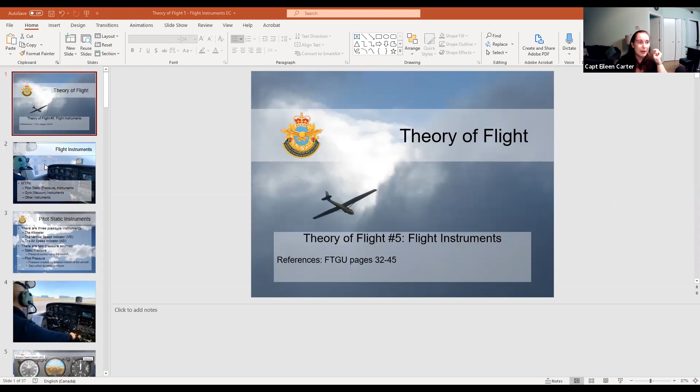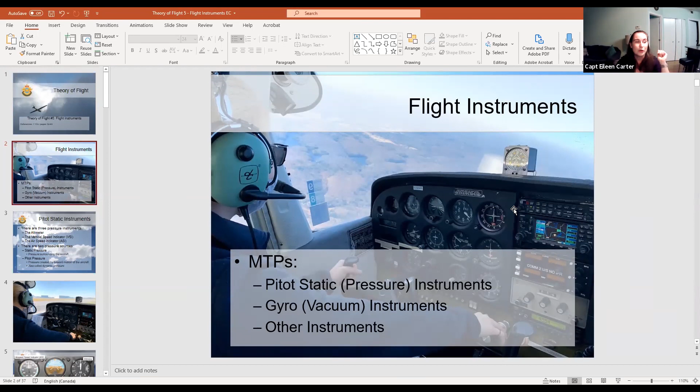All right, so flight instruments, what are those all about? Well, we've got a couple of main teaching points for you guys tonight. Let me see if I can make that a bit bigger. Can you guys all see the screen really well? Let me know if there's any problems. So our main teaching points tonight, we're going to talk about 2 main categories of instruments, plus the others. We'll talk about pitot-static or pressure instruments. We'll talk about gyroscopic, which are vacuum powered instruments. They could be electrical, but either way. And other instruments. So that's the goal for tonight and our 3 main categories.

So I think that the warrant officers are going to talk to you first a little bit about the 3 main types of pressure instruments that we deal with. We see these both in powered aircraft, like the one you see in this slide here, and in gliders, which some of you guys will hopefully learn how to fly next summer. Go ahead, you guys. Awesome. Thank you for the introduction, ma'am. So I myself am a glider pilot from 2 summers ago, also from 706 in the Ottawa region. So great to see so many of you here taking this ground school.

Just to start off now with the pitot-static instruments, as Captain Carter mentioned, there are 3 pressure instruments, and they are the altimeter, the vertical speed indicator, and the airspeed indicator.

Together, they use the pressure system that is comprised of two pressure sources: the static pressure source, which is the pressure surrounding an aircraft. So right now, say you're in a room, the ambient pressure around you could be similar to what you would see as static pressure.

And then we have the pitot pressure, which is created by the forward motion of the aircraft. So it's like if you put your hand out of the window of a moving car, you know that the air is hitting it at a higher rate, and there's more air against your hand, so that'll kind of push it back or push it up. So those are the two main pressure sources, and they pretty much comprise how the other three instruments above work.

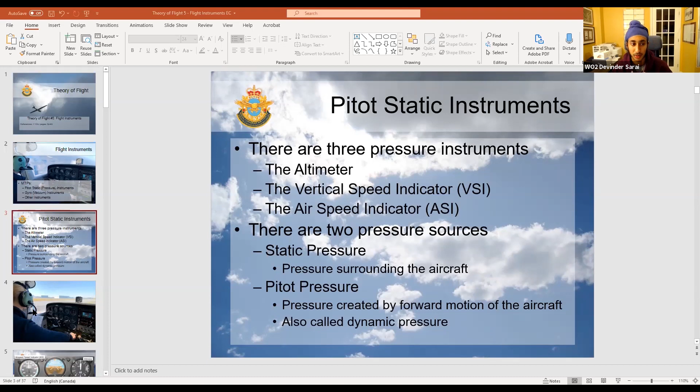All right. And so here is a look at an instrument panel in a Cessna 172. So you can probably make out there's an instrument. Can you see my mouse on the screen? Are you guys able to see that as it moves? Yeah, Sergeant Sutton's nodding.

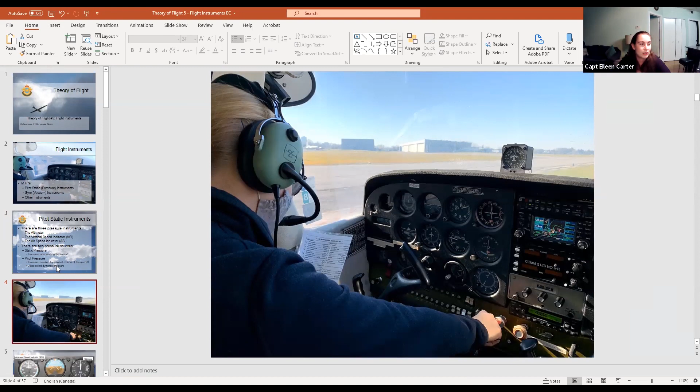Got an altimeter here, a vertical speed indicator here, and the airspeed indicator. It's a bit hard to see over here, but don't worry, we have some more pictures for you. There you go.

So we've labeled them here for you, and we are going to talk about the other three that are currently unlabeled. We've got an airspeed indicator at the top left, altimeter at the top right, and a vertical speed indicator, VSI, at the bottom right. Pilots traditionally refer to this as a six-pack. These are the important instruments to be referring to throughout your flight.

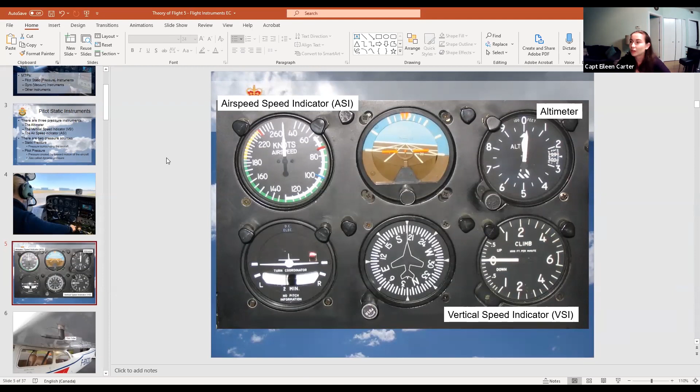So do you guys want to give a little bit of an explanation about the pitot and static ports? For sure. So the pitot tube is what collects the pitot pressure that we discussed earlier, pressure created by the forward movement of the aircraft. So it's going to be facing directly into the direction of the aircraft. But does anyone know, you can type it in the chat, why it's on the wing? Why isn't it right beside the fuselage, or right behind the propeller?

Because that's right where the wing is before it gets interrupted. Because in the back, the air that's coming would have already been hit by the wings or the body of the aircraft. Okay, really close. Yes, from 742, it would get a false reading from the propeller, right? Because the propeller is shooting all this air back. So you're going to be thinking that you're at a different speed than you actually are. So that's pretty much the pitot tube.

Did I miss anything, Gimenakis, on that? I don't think so. You pretty much covered the main points. If there's one takeaway, it would be that the pitot tube gets the air pressure as a result of motion. So depending on the different speeds or motions the aircraft is going through, that pressure will change.

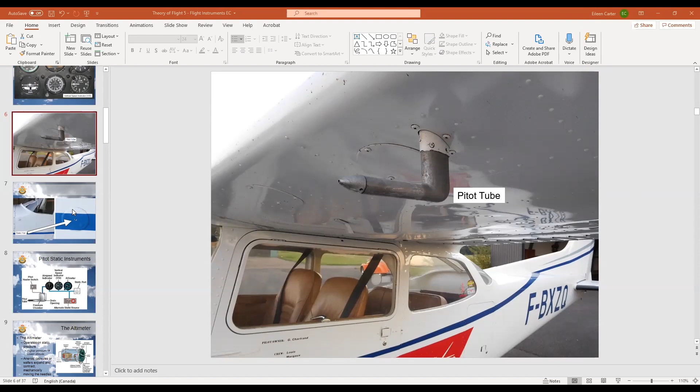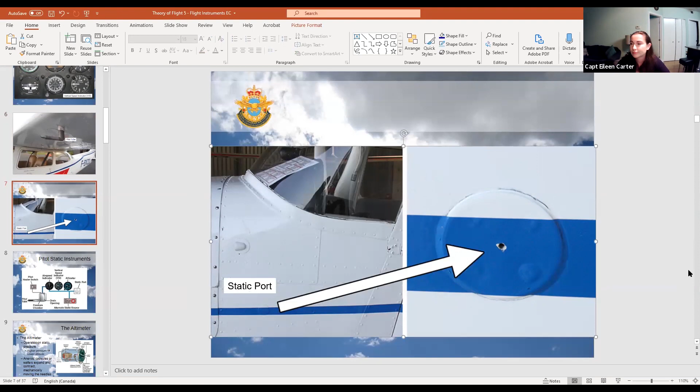Great. And so here's a look. There's two pictures here. This is the nose of the aircraft. You can see there's the dash, the instrument panel, and then the static port. Oh, I think it's behind this label, actually. There it is. The static port is that little circle right there. And then here's a close-up of that. Yeah, so most times it's perpendicular, so 90 degrees to the relative airflow. So that's only capturing the ambient pressure and not the pressure created by the forward movement of the aircraft.

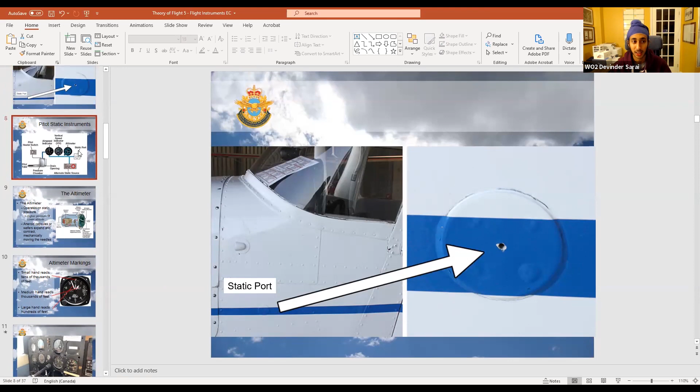Great, and then together, both of these, the pitot tube and the static port, combine to create the pitot-static system, which is in this diagram right here. So the pitot tube takes pitot pressure, and the static port takes the static pressure. With these two together, they provide the basis of the functionality for the three instruments that we discussed.

It's important also to note that the only one that's using both the static and pitot pressure is the airspeed indicator. So that's definitely really key, especially for studying. Airspeed indicator is the only one that uses both of these sources. And just to give a brief explanation of why, it's because when you're calculating speed, you need to know your movement going forward, because that's what speed is, right? Whereas the other ones, the vertical speed indicator and the altimeter, only use the static port.

There's also two other things here that I haven't touched on yet. The pitot heater switch, so that can prevent ice buildup in the pitot tube, which we'll probably discuss later in errors, but that'll just keep your air consistent and prevent any blockages, which could lead to other problems.

And the second one in the bottom right is the alternate static source. So that's in case your static port is blocked, you can use another source that will serve in the same vein. And fun fact, in most airplanes, you can actually break the glass with the VSI to act as an alternate static source, just for those of you who are curious.

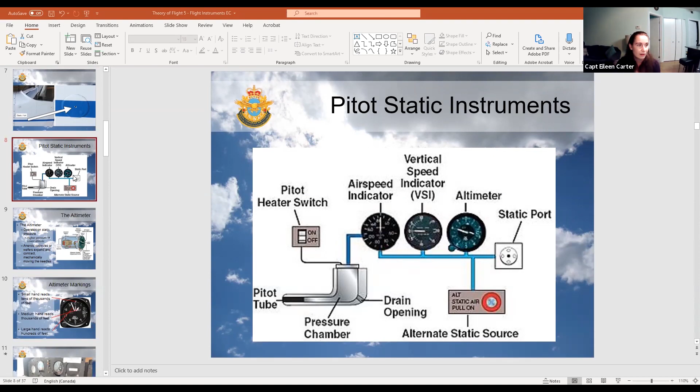So let's talk a little bit more specifically about the altimeter then. Oh, and Sergeant Louise put their rank on there too. Thank you so much. So like Warrant Officer Sarai was saying, this operates on static pressure. And so it doesn't need the dynamic pressure of what we had earlier. And inside are something called aneroid capsules or wafers. I, as a cadet, always found this really hard to understand.

But what I do understand is if I have a bottle of water and I go on a commercial flight, Air Canada, WestJet, and I sip from that water, and then at some point I put the cap on and the aircraft goes to land, what does that bottle of water look like by the time we land? Has this ever happened to anybody? The bottle of water that I've half drunk, or maybe it's empty, what does that look like by the time we get down on the ground?

Sergeant Sutton says it's squished. A couple of you guys have your hands up. You can go ahead, say it out loud. You can unmute yourself and participate. Sergeant Defer thinks that after landing the water bottle has expanded. That's the opposite of what Sergeant Sutton thinks. What about the rest of you guys? Sergeant Billet or Cadet Abu Hamad, what do you guys think?

So the air in the half of the bottle that has air left in it gets expanded at high altitudes. It's true. And then once you go to lower altitude when you're landing, it'll compress the air that's in it. Exactly. So it'll kind of get smushed a little bit.

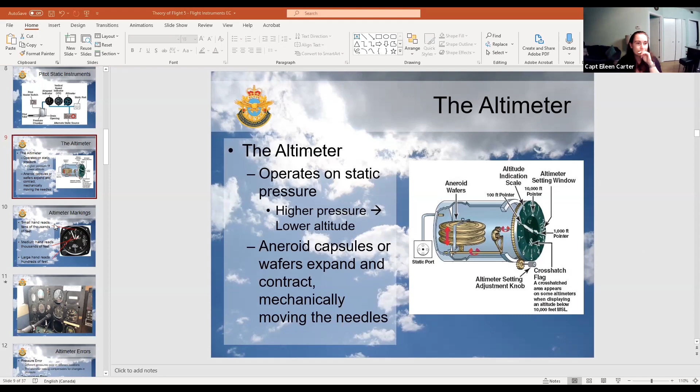And so these are examples of how air pressure is changing things inside your ears. So we all do actually understand how altimeters work. Do you guys want to add some more to that there, Warrants? I think you covered everything. Okay. I agree. Well, why don't you guys follow on then with our markings of an altimeter? For sure. Gymnakis, you want to take this one? Yeah, let's go for it.

So as we can see, the chart is pretty self-explanatory. It works in the same manner as a clock. Your shorthand, your super shorthand actually, is... Mind if I interrupt you? Oh, go for it. Because a lot of the people in this virtual room might not have ever read an analog clock.

So give me a yes. There's a little thing you can select that says yes, near where you raise your hand. Give me a yes if you read a clock with hands and a no if you don't. I want to know if you guys know how to read a clock with hands or not. You can put it in the chat. As a matter of fact, in the chat, can you guys put up what altitude this is indicating?

Ooh, there you go. That's even better. So I'm getting yeses from some of you guys anyways. All right. Well, I have more faith. I was thinking that you guys might only know how to read an Apple Watch or something like that. Okay. Sorry for interrupting.

Oh, some good, interesting guesses in the chat for the altitudes too. All right, so I'm seeing it's pretty much varied between 1,950 and 950 feet. So there's a bit of confirmation bias as well in the chat. I think so as well. So far, I don't think anyone has the correct answer. I'll give you a hint. Pay close attention to the increase between hundreds of feet, like how many tick marks there are between each.

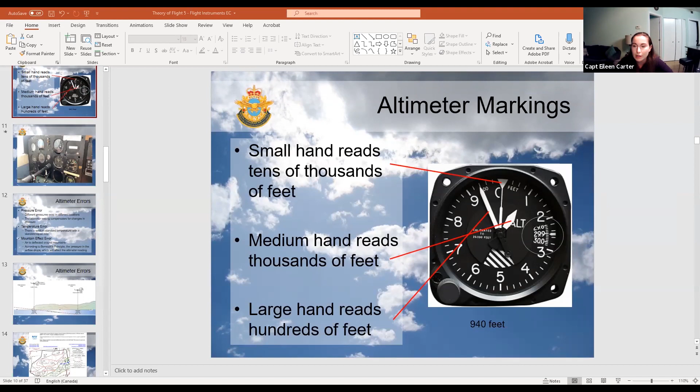I actually have a short video clip a couple of slides up to show you about that. I have a video right now for you. It's an aircraft in flight that's just below 3,000 feet and it's climbing. So let me share that with you. It may play a little bit choppy, in which case we'll replay it. It's also a little bit loud, so be prepared if you have a headset on. I'll turn down the volume a bit too. It is this loud in an airplane, but you're wearing a headset, so that makes it easier. All right, here you go.

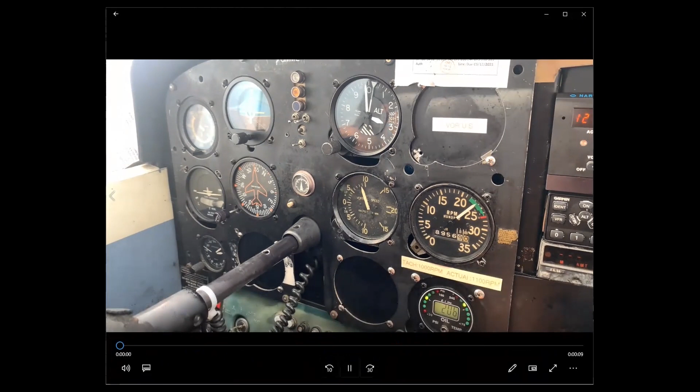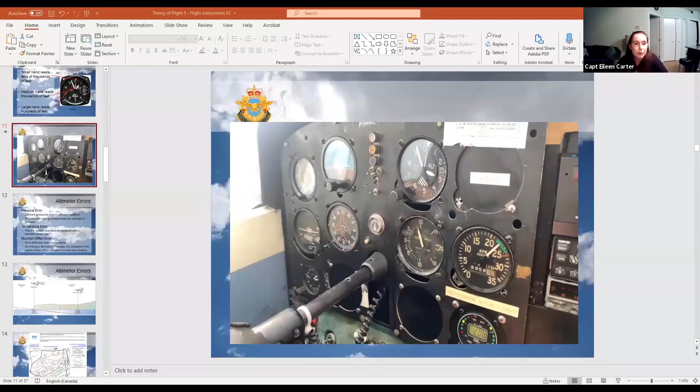Oh, it's really choppy, isn't it? Did it play for you guys? It did not. All right, let's try it again. Yeah, it might be asking too much to have 51 people and a video. I'm going to try and play it out of the PowerPoint instead, because it's also in there. And if not, I will post this video for you to watch on your own. Does that sound fair? We won't hold up everything.

Oh yeah, here you go. Can you see the needle moving now? It's gotten a bit choppy, but you can get a couple of frames out of it. Anyways, that's the altimeter climbing up. I will repost that on the website a little later so that you can see it for yourself. It's just a short little clip to see that altimeter in action.

So the altimeter is subject to, oh, my PowerPoint is now frozen too. That's what I get for playing videos for you, hey?

There we go. So the altimeter is subject to actually a number of different errors. We're talking to you about 3 specific ones because they're more important or more noteworthy. But you can imagine it has mechanical problems and things like that too. So the three we're going to talk to you about are pressure error, temperature error, and mountain effect error.

And Warrant Officer Chamanakis already spoke a little bit about how pressure is different in different locations, and that's why we have to move that window. And I'm going to show you a little bit about what that looks like, what that means. And we're able then to change the setting to match the pressure in the place that we're going.

A good analogy that helped me to understand this was, we know that right now here in Ottawa, it's just coming up on 7 o'clock, but in Manitoba, it's coming up on 6 o'clock. So we know if we fly to Manitoba, we have to reset our clocks, and we've got a dial or a setting that will allow us to reset our clocks to adjust for that. And the altimeter is the same.

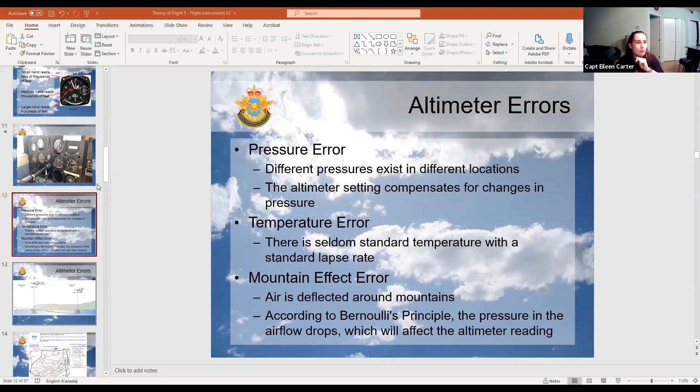So if you're worried about it going a bit fast, we are going to come back with diagrams to each of these, assuming that the PowerPoint will cooperate. We might need to restart that.

So how can this possibly work? Let me turn away my messages.

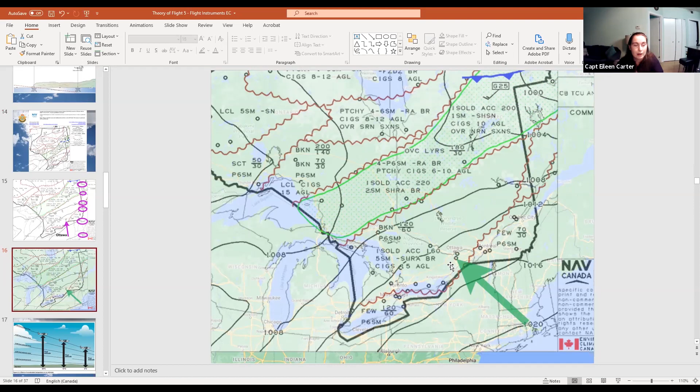These are lines that join areas of equal pressure. Do you remember what those are called from your meteorology class? Lines that join areas of equal pressure? Isobars. Flight Sergeant Falsetto did raise their hand, and then everybody typed it in, but yes, isobars. So this image is showing isobars.

So I'm going to go back to the original one. You can make them out now where I had them circled, and you can see that pressure is decreasing as we move north from Ottawa. And so if we were to get in an airplane and fly a couple hours north, our pressure would have really changed. And so if we don't reset our altimeter, we'll have an error.

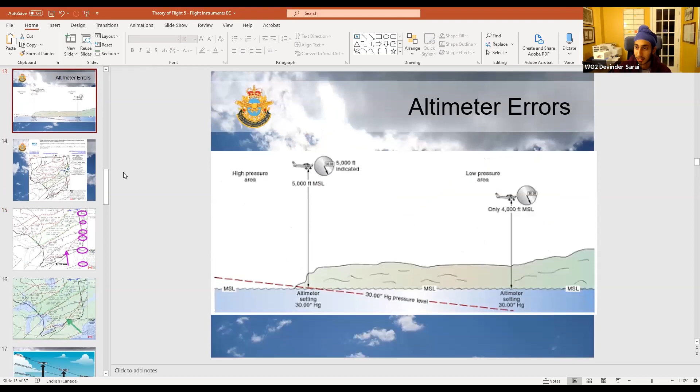Do you want to add to that, Warnester Sarai or Warrant Officer Chamanakis? I think you have a really good example a few slides up as well to show that pressure can change overnight, right? So when you come to your aircraft in the morning, or if you are planning to go on glider, when you get to the gliders in the morning, sometimes it can be reading even below ground. So that's something to watch for too.

I do. Shall we try playing this video and see how choppy it is?

So I'm a flight instructor at the local flying club, and I was the first person to fly this airplane one morning. And when I got to that airplane, this is what the altimeter said. Now, we're not at sea level here in Ottawa. If the ocean was here, it would in fact be about 200 feet below us. Because of the way that the ground rises coming away from the ocean, our ground level is 200 feet above the ocean. So according to this altimeter, I'm almost 300 feet underground, which is truly false.

What's actually happened is an area of high pressure has moved over Ottawa overnight and has told this altimeter that the pressure is higher. And therefore the altimeter says, well, I have to go lower then. I must be underground. So it's a really great example of an altimeter error. And then I'm going to use the knob on this left-hand side here to change this window to the correct altimeter setting. And I know at Rockcliffe Airport that the ground level is 188 feet. So that's what I'm going to do here.

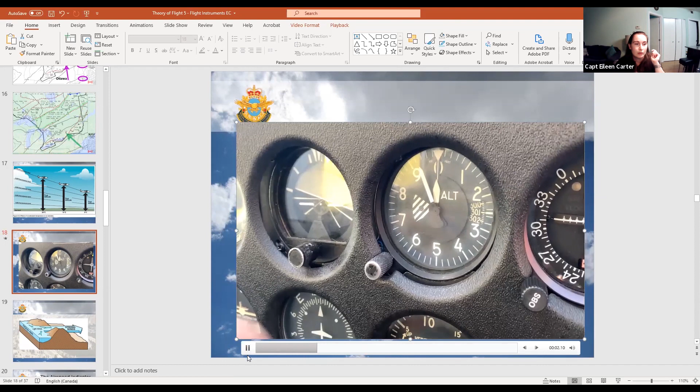Let's see if the video will play. Cross your fingers. Well, that was a bit choppy. We'll do it one more time. That was much better. I will repost it for you as well. Did you get a chance to see that?

Did that make sense? I adjusted the subscale so that the altimeter error was removed. The pressure error was removed. Anything to add to that one, Mr. Chemanakis? Nope, I think we're good. Cool. I'm going to back up one slide here.

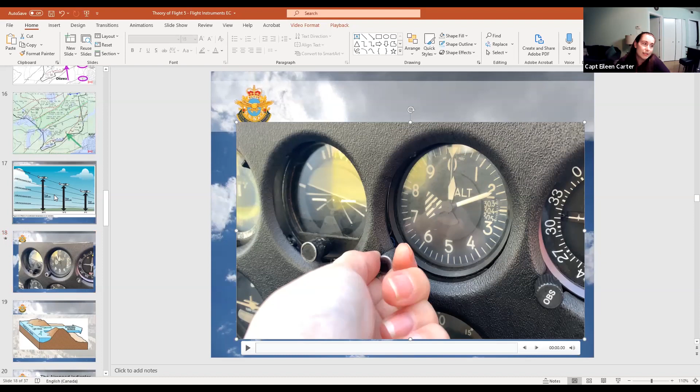So in a similar way to how pressure can change over distance, and you can then get an altimeter error, temperature can change over distance. And when temperature gets colder, it also makes the air more dense. And as a result, you're lower than you think. So if you were to fly as this aircraft did, when their altimeter was reading 5,000 feet in 30 degrees Celsius, if it flew into a colder area, the same way it can be a different temperature in Montreal than it is in Ottawa, maybe not 15 degrees different, but a couple degrees different.

And obviously some aircraft fly a lot farther. They might end up in Vancouver a few hours later, might have a very different temperature. Flying into 15 degrees or 0 degrees will create a big altitude difference, a big altimeter error if it's not corrected for. And typically we correct for this just by changing the subscale on the altimeter, but there are additionally calculations that we can do.

It's not required in this class, just interesting for you to know that we can calculate the true altitude using information about the temperature and the pressure. So that's something you will do in a couple of years when you're on your course to get your private pilot's license. You guys want to add to that? Sure. I'm just wondering, who knows what the standard ICAO temperature is at sea level? Way to drag meteorology into the conversation some more. That's good. Yes, exactly. 15 degrees Celsius.

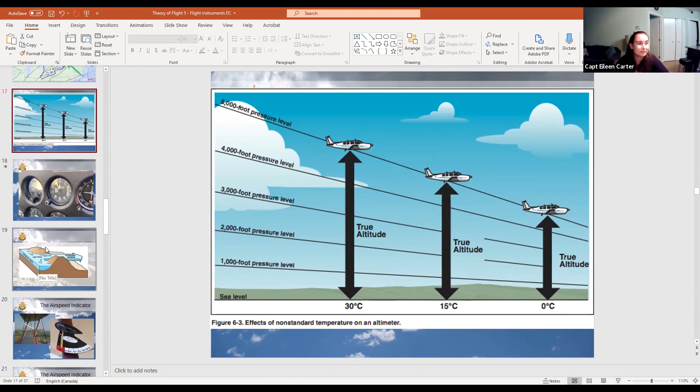So the last of the 3 errors that we said we wanted to talk to you guys about is a mountain effect or a mountain error. Earlier in Theory of Flight, you learned about Bernoulli, right? Which said that if something in a system changes, something else has to change to correspond. And I think many of you guys on a hot summer's day have had a hose in your hand and put your thumb over the end of the water hose. What happens when you do that? When you're holding a hose of water with a big open end, and you put your thumb over the end of it and block part of the opening, what happens to the water?

A couple of you guys raising your hand, go ahead and tell me. We get a spray, it shoots out, the stream gets stronger. Yeah, so you guys have all personally experimented with Bernoulli. You guys all know what I'm talking about, right? So it gets stronger, and it gets stronger because the opening is smaller, so the water has to go through there faster. What's interesting that you probably don't realize is that at the same time, pressure also decreases.

So the image you're looking at on your screen, my audio is bugging out. Is that happening for everybody or just for Corporal Weiss? It's fine for me, so. Okay, sorry about that, Corporal Weiss. It might be your internet. Yeah, I'm aware. We're gonna go over time. It's fine.

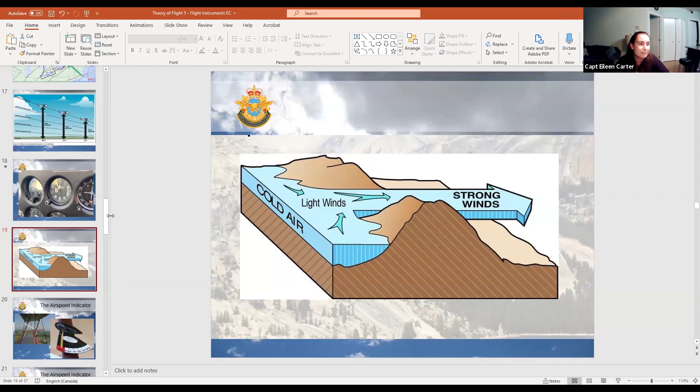It is the equivalent, like what Warrant Officer Sarai was saying at the beginning of the class, of sticking your hand out the window of your car. And I think if you did that, and somebody said, oh, we're going 50 or we're going 100, and then later they asked you how fast are we going now, you could probably say, just based on your experience, you've calibrated your hand out the window of your car, you'd be able to say you're going 50 or 100, maybe even 30, whatever the speed was. So this is the original airspeed indicator. It's not more complicated than that.

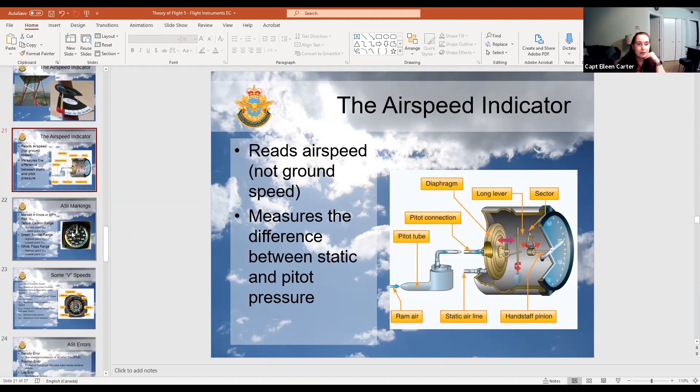This is the fastest speed that the airplane should go. Can it go faster? But it shouldn't, is the point. It's the velocity you shouldn't exceed. We may talk more about why that is in a different class. And the other end of the scale, all the way back over here, is VSO, which I'll give you some definitions of on the next slide.

LAC Zaidan, why don't you unmute yourself and tell us what your question is, because I'm not quite following you. Do you have a microphone? Can you tell us? Can you hear me? Yep. Okay, when I mean that indicator, I just want to ask, isn't there the same instrument, but that indicates the speed, but inside the cockpit, inside the airplane?

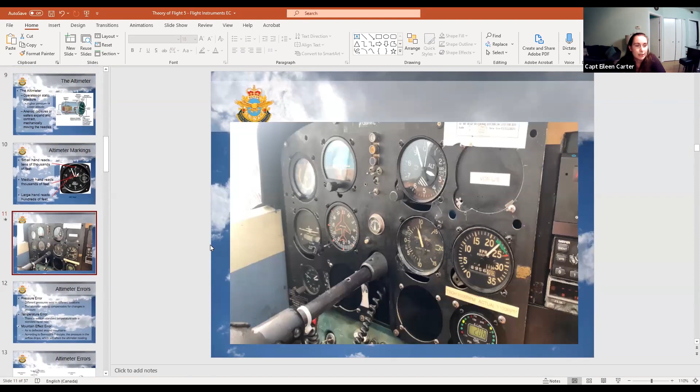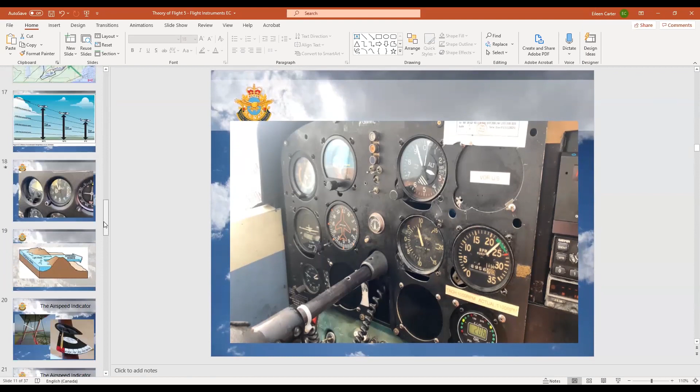The one that you're seeing on the screen there, oh, let me show you. See this picture here from inside of the cockpit? That instrument here on the left-hand side that's a little bit blurry because it's a bit farther away is the same one that I'm showing you a slide of now. Okay, thank you. It's just in the old days, they had to put them outside because they were working on technology. They had no iPhones or anything. Okay, thank you. You're welcome.

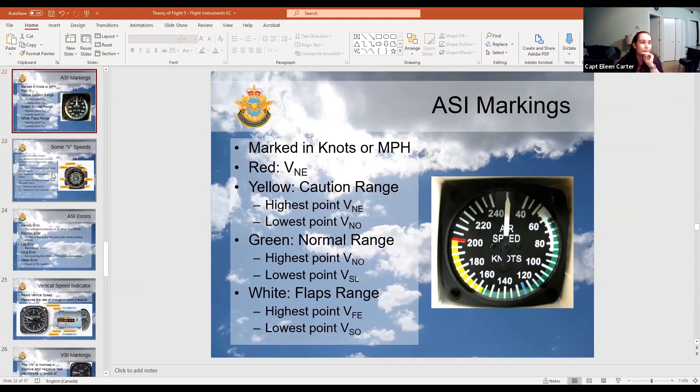My slide won't change for some reason. Anything to add to that, guys? Excuse me. Yes, please. In like a usual circuit, what speed would you be going at in different parts of the circuit, like a glider, for example? All right, well, I'll let one of our glider pilots answer.

Good question. So what speed do you want to be going in the circuit? So on the downwind leg of the circuit, you want to be established at your best L over D speed, so like your best glide speed for 233, like around 50 miles. And then once you get on to your base turn, so you have downwind, base, and then final, you want to establish yourself with the speed that you'll do in your downwind checklist, which is for another time, based on the winds of the day, pretty much.

And then say that you have a headwind at like 10 knots, you want to take 10 extra miles per hour of airspeed so that you can actually have the same ground speed when you're landing. But we never go below the best L over D speed, the best glide speed, even if there is a slight tailwind, which is really rare, because then we're in danger of stalling. Good question. Great answer. Thank you.

So on here is a list of V speeds. I'm going to post these slides because, I mean, the three of us pilots, we could talk forever to you about flying, and I'm already at what's normally the end of class time. We're clearly going to go over, and I can't go past 7:30, obviously. So you'll forgive me for not going through all of these.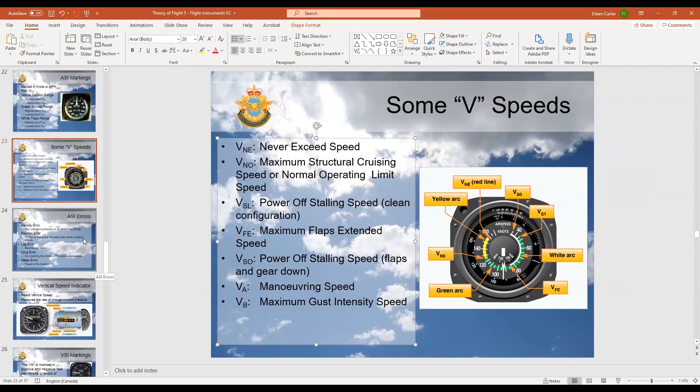Okay, so the airspeed indicator also has some errors. I don't have diagrams for you for these because they're fairly straightforward. Warrants, did you guys want to go through these? Because otherwise I go through them very slow, so you guys might be a little faster than me. Yeah, sure. I think I can cover them quickly.

Pretty much, whenever you're not at sea level, there's a non-standard pressure because it's calibrated for the pressure of 29.92 inches of mercury. Two, we have position error. So kind of how we talked about why the pitot tube isn't right behind the propeller with slipstream, there still is some position error with the relative airflow. Lag error is just mechanical friction between the parts.

Icing error is, so we talked a little bit about ice covering the intake of the pressure sources, which is why we have the pitot heat. And then water error is water in the system, which we counteract by having our pitot tube cover on when we're not flying.

I know we went through that a bit fast, but these are not things you're likely to be asked about on your entrance exam. What we want you to take away from here is that there are a variety of small things that might happen to affect the airspeed indicator, predominantly related to the pitot tube or to the temperature and pressure.

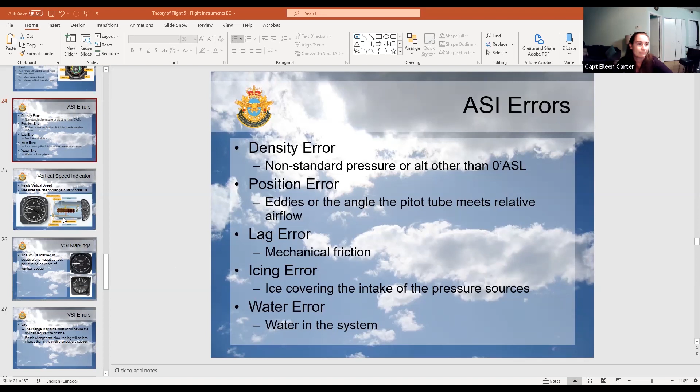All right, for whatever reason, my slide won't change. That's no good. Oh, there we go. All right. I think because I'm hosting so many of you guys, it's just got a lot of lag.

All right, so the vertical speed indicator is the third and last of our pressure instruments. It just tells us how fast we're going up or down. And if you remember that video that I showed you, which I'll repost so you can see again, it was an instrument, in this case just below the altimeter, that showed that we had a rate of climb or a rate of descent.

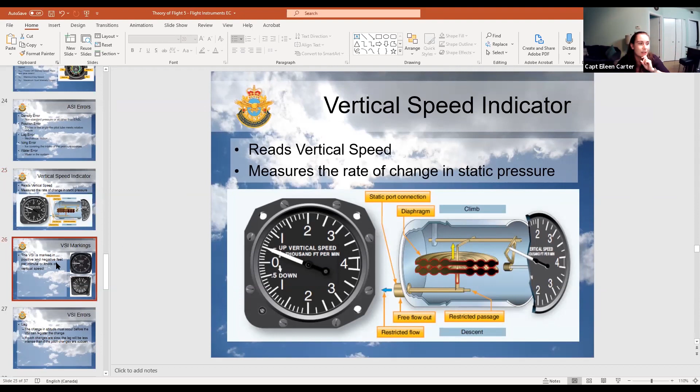It's got some discs inside, and it can basically compare the rate of change of static pressure. So it can tell if the pressure is getting lower or higher and how fast that change is happening. And it translates that into, oh, we're climbing 100 feet per minute, or we're descending 200 feet per minute. And so that's the purpose of the vertical speed indicator. It's got markings, and it depends on what you're flying.

If you're flying a nice soaring glider like Warrant Officer Sarai or Warrant Officer Chemanakis in the summer, it might be like the bottom one, showing a climb or descent in knots.

And so when you find a really great thermal and you're climbing in your glider in the thermal to stay up for, what was your longest flight this summer? 4 hours, something like that? No, it was 2 hours and 36 minutes. Oh, pardon me, only 2 hours and 36 minutes in a glider.

Then maybe it'll show that you're going up 4 or 6 knots. If you're in a Cessna or another aircraft, it might be a little bit more like the top one there.

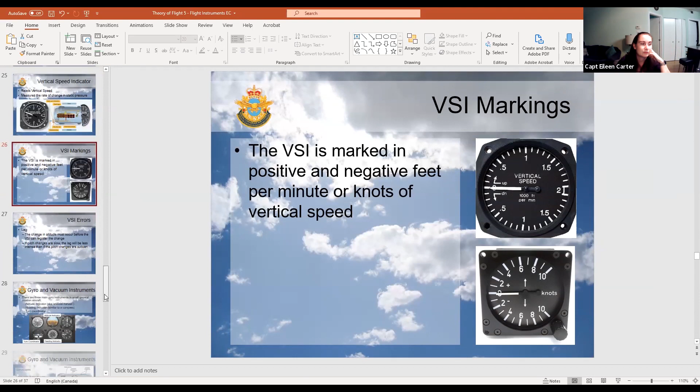And the vertical speed indicator, the VSI, is subject to errors as well, because it has to have an actual change in altitude in order to register the change. Then there's obviously lag. That is to say, you have to climb a little bit before there can be any change. So only then can it register the fact that there has been change. And so as a result, we sort of expect it to be a few seconds behind what it is that we're doing.

Oh. I think your instructor for your next class is here to check things out. Hello, Lieutenant Weinberg. I'm running a little bit behind, I'm sorry. Let me know if you can hear me. It's not my fault, it's just that my slides don't work.

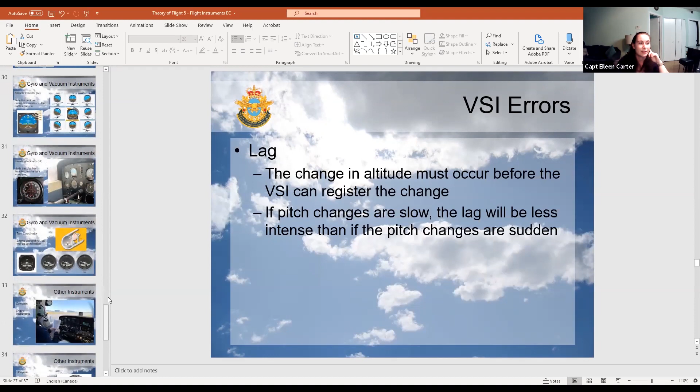All right, so I'm gonna really quickly tell you about gyro and vacuum instruments. The reason it'll be pretty quick is, well, I'm almost out of time for you guys, but also it's not something that you're likely to be examined on. So I just don't want you to leave with an incomplete understanding of instruments. Originally, we said that we were going to talk about the 3 pitot-static instruments, the altimeter, the vertical speed indicator, and the airspeed indicator, and there were 3 other ones here.

We've got the attitude indicator, sometimes called the artificial horizon, because you can see it's got a little orange plane in there. It's got the ground, it's got the sky, so it's a little bit like having an artificial horizon. We've got a heading indicator. You can see the similarities to a compass, and a turn coordinator.

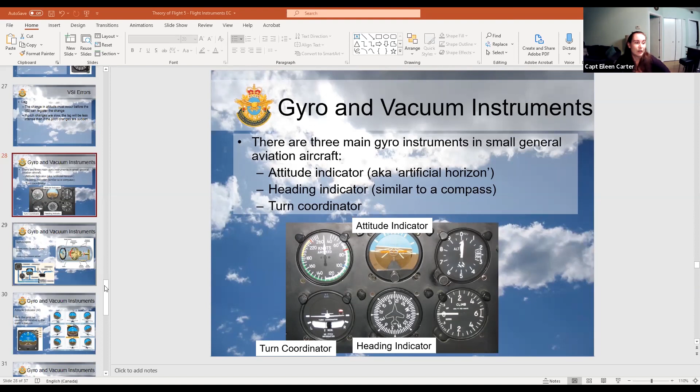Fairly frustrated with my slides that I can't get to the next one.

There we go. So you guys know what a gyroscope is, right? You've seen those spinny things like NASA has at trainers where you can spin around in 3 dimensions, or maybe you've even played with a gyroscope. If not, you know what a spinning top is, perhaps. And so the idea of a gyroscope is that it will spin, and no matter what the airplane around it does, it will stay rigid in space. So the airplane moving can show something happening in a dial. That's what you're looking at here. They can be electric driven or vacuum pump driven.

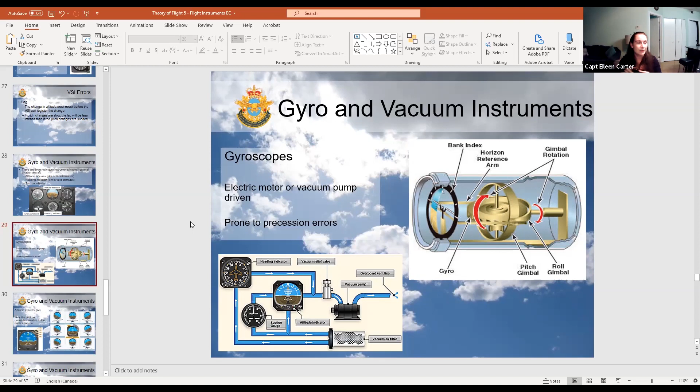I left a really cool video of the vacuum portion of that on the website for you to take a look at a little bit later. And so that'll be interesting for you to see, I think. Interestingly too, there's recent news that at least in the United States, they've started allowing digital ones. And so vacuum instruments may become a thing of the past, but it's not really relevant to you guys right now. So the attitude indicator is this first instrument.

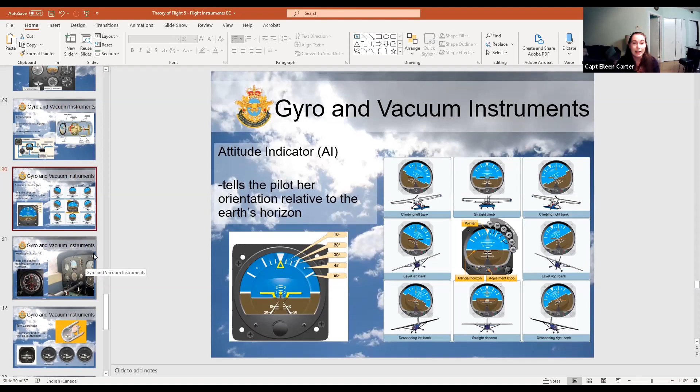You can see the little yellow wings of the airplane, the blue for the sky and the brown for the ground. And on this slide here, you can see what would happen if you were, say, banked to the left in a straight climb, descending to the right bank. And it'll show you what your airplane is doing relative to the horizon. This is pretty useful if you're flying in clouds, flying at night, or somehow disoriented.

The heading indicator is a little bit like the compass, except that this tells the pilot what her heading is in a different way. So the compass is usually up higher here, and it turns a little bit awkwardly. You guys have all worked with a compass before in the field, probably. And the heading indicator is sort of flat, closer to the front view of the pilot. And so it's easier to look at. And when you turn to the right, it also turns that way too. So it's not a bit backwards.

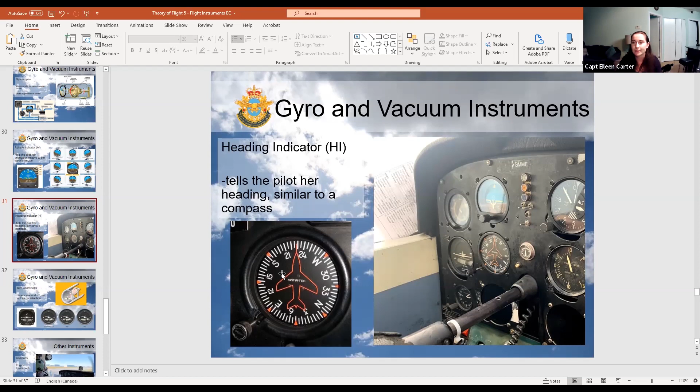I'm not sure, Sergeant Yan. It might have an altimeter setting. I don't remember. Does anybody else have an Apple Watch that knows the answer to that?

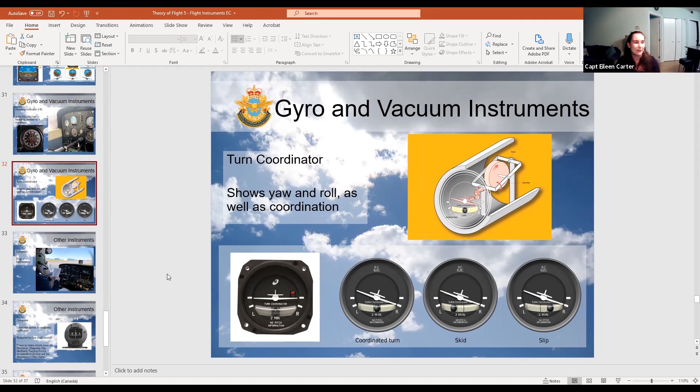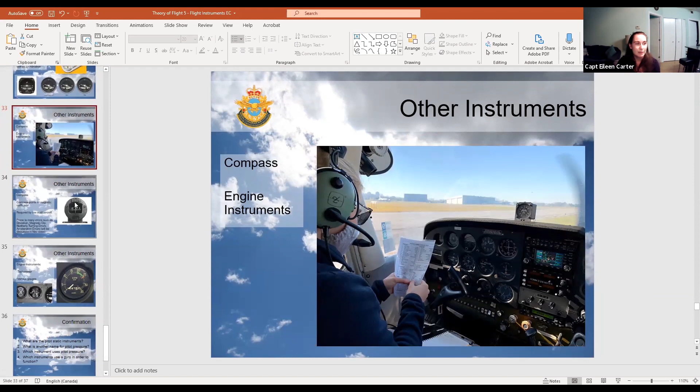Lastly, the other instruments we wanted to just very briefly mention to you for completeness. No need to necessarily know a whole lot. There is the compass and engine instruments. You guys already know what a compass does, points to north and is required in aircraft.

And then for the engine, there is something called a tachometer. It just tells you how fast specifically the crankshaft of the engine is turning over. And it's calculated in revolutions per minute, RPM. And it has a normal operating arc, a green arc, and a red line too, where you're not supposed to go faster.

And then most aircraft have additional gauges, as you can see in this picture here, for example, showing how much fuel you have, or showing, this one actually is EGT. I meant to put a picture in here showing oil temperature and oil pressure, but I put the wrong one in apparently.

Warrant Officer Strai and Warrant Officer Chamanakis, anything to add? I'm down to the wire here, sorry.

I think there's just an interesting point for the Gen Zs in the call with gyroscopes. If you think about the fidget spinner craze, a fidget spinner is a gyroscope essentially, right? So if you spin it really fast and you hold it and you try to change its direction, it'll actually resist you changing direction. And it depends which way you turn it and then which way you try to change direction. So that's a good way to think of it when you watch the videos on the site as well.

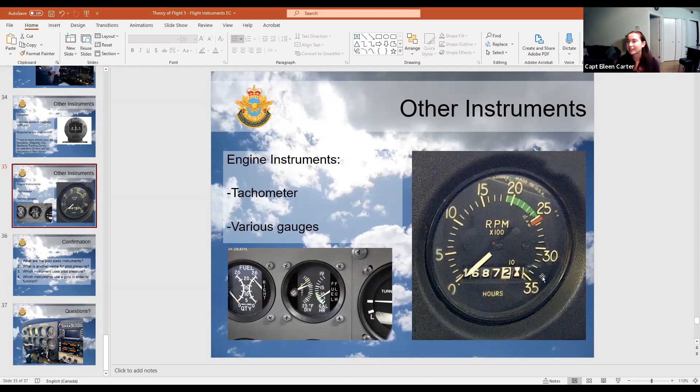Fidget spinner. I didn't think about that. We should add that in here. That's cool.